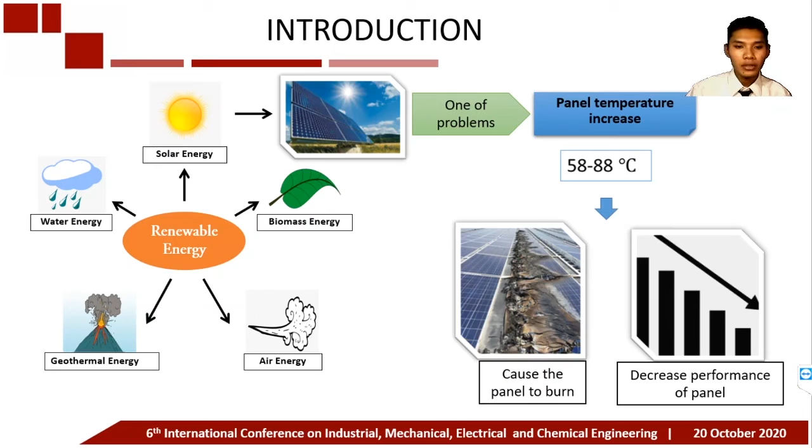There must be a solution to this problem, namely by cooling the solar panels. There are two kinds of solar panel cooling, namely active and passive cooling. Examples of active cooling are cooling with a circulation water system and thermoelectric cooling. Active cooling requires additional power from outside, so it's considered less effective because it can reduce the efficiency level of the entire solar cell system. Passive cooling was chosen because it works without external power and takes advantage of natural convection to transfer heat from the solar panel to the environment.

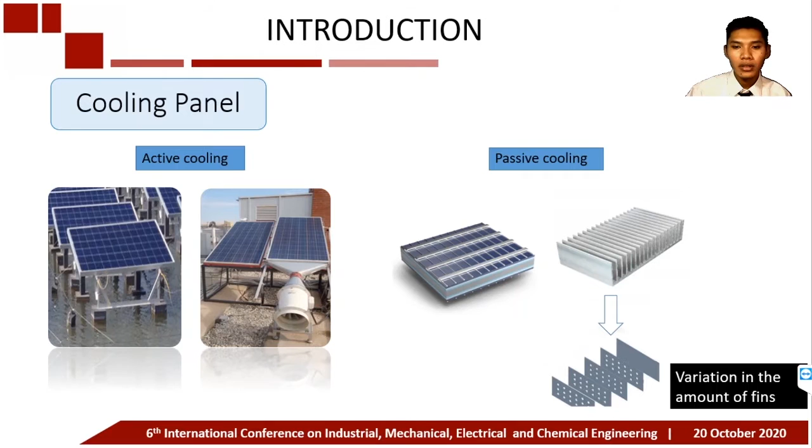An example is the use of heatsinks that have convenience of manufacturing, installation, and placement flexibility for solar cells. In this case, I use a heatsink with a copper-based material and add perforated aluminum fins. The variation of my research is the effect of increasing the amount of fins on the performance of solar panels. And then about the objective: how does the amount of perforated aluminum fins on the heatsink with copper base affect the temperature and performance of the solar panel?

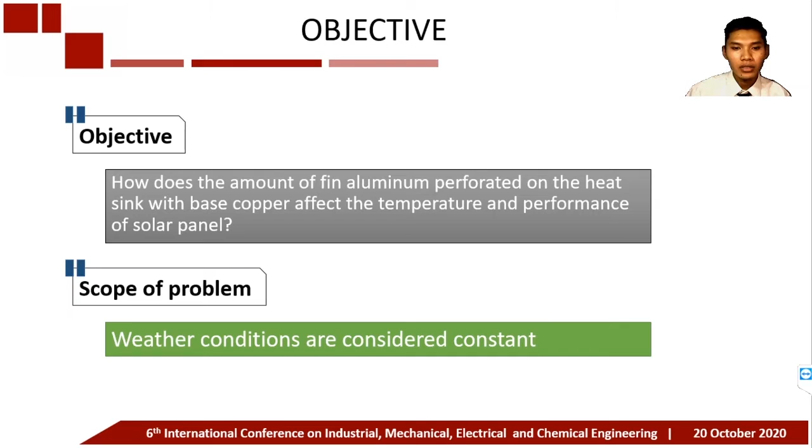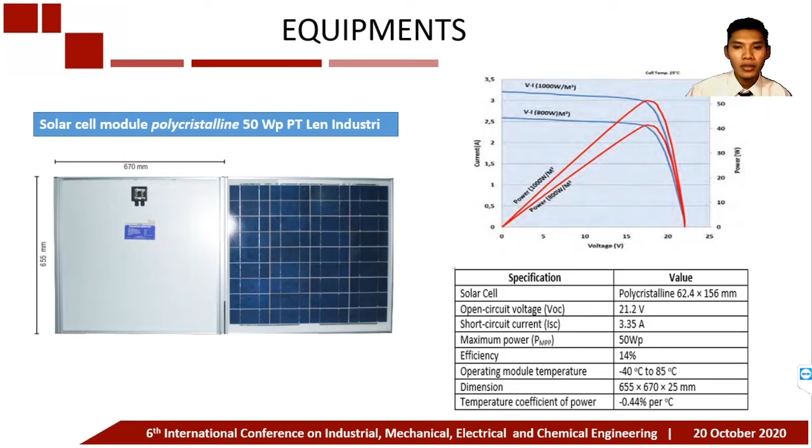Scope of the problem: weather conditions are considered constant. In this research, I used a 50 watt peak polycrystalline solar cell produced by PT Len Industri. The specification can be seen in the table, where the polycrystalline solar panel has a maximum efficiency of 14%. Installation of heatsink: I am using a heatsink with dimensions of 600 by 620 millimeters. The heatsink is 2 millimeters thick on the copper base and 3 millimeters on the perforated aluminum fin. In the variation of 5 fins, the distance between the fins is 122 millimeters, and 10 fins have a distance between the fins of 50 millimeters. The heatsink is mounted on the back of the solar panel.

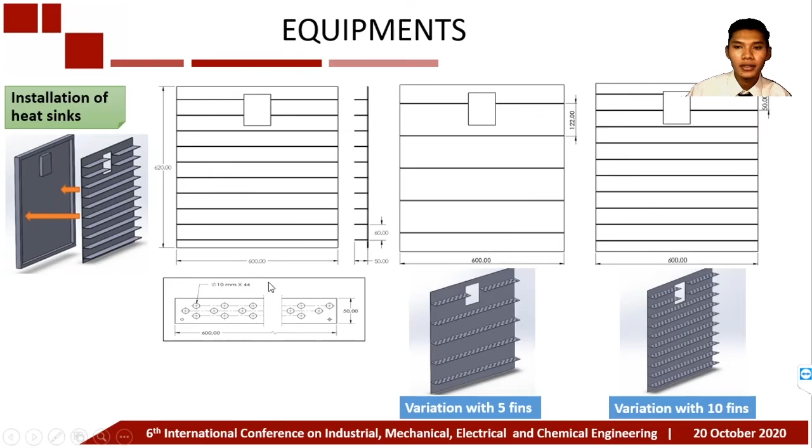And then the result: the temperature graph shows an increase in the intensity of solar radiation causes the temperature of the solar cell to also increase. At a solar radiation intensity of 1100 watts per square meter, the solar cell without cooling, the solar cell with 5 fin heatsink and the solar cell with 10 fin heatsink obtained maximum temperatures of 64.6, 57.7, and 55.6 degrees Celsius respectively. Rahman's experiment also stated that the increase in solar cell temperature was due to the large intensity of solar radiation captured. The higher the intensity of solar radiation, the more photons will be captured. If the photon energy absorbed exceeds the band gap energy limit, the temperature of the solar cell will increase. Increasing temperature can result in decreasing efficiency of the solar cell.

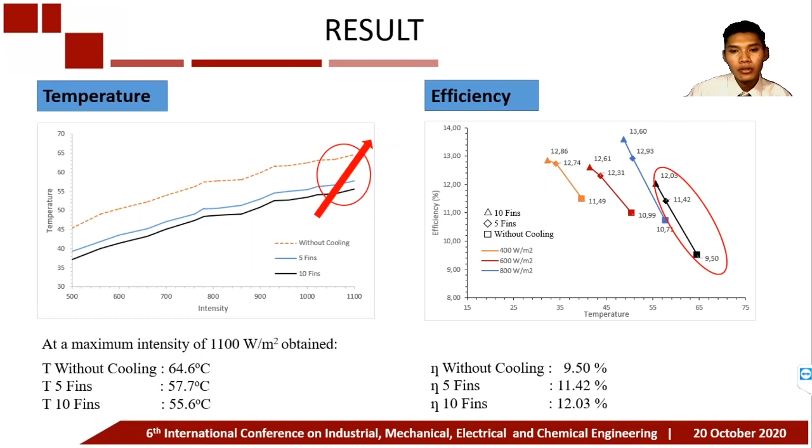The panel with a 10 fin heatsink obtained the highest efficiency compared to the other variations, 12.03% at 55.6 degrees Celsius. The panel with 5 fin heatsink obtained an efficiency of 11.42% at 57.7 degrees Celsius, while the solar cell without cooling got the lowest efficiency of 9.5% at 64.6 degrees Celsius. When the power generated by the solar panel decreases due to an increase in panel temperature, the efficiency produced by the solar panel will decrease.

And then about open circuit voltage: at maximum radiation intensity, the lowest open circuit voltage value was obtained by the solar cell without cooling, 19.2 volts. The panel with a 5 fin heatsink obtained an open circuit voltage of 19.5 volts. The highest value was obtained by the panel with 10 fin heatsink, 19.6 volts. The increase in solar radiation intensity causes the temperature of the solar cell to rise, creating a reverse saturation current effect. This effect is very much influenced by the temperature of the solar cell. The greater the reverse saturation current effect, the more the open circuit voltage decreases.

And then about short circuit current: at maximum radiation intensity, the short circuit current of the solar cell without cooling is 2.81 amperes, whereas the solar cells with 5 fin and 10 fin heatsinks yield 3 amperes and 3.12 amperes. The short circuit current will increase with increasing intensity of solar radiation. The magnitude of the solar radiation intensity affects the energy of photons captured by the solar cell. The more electrons that are excited by photon energy, the greater the electrical current generated.

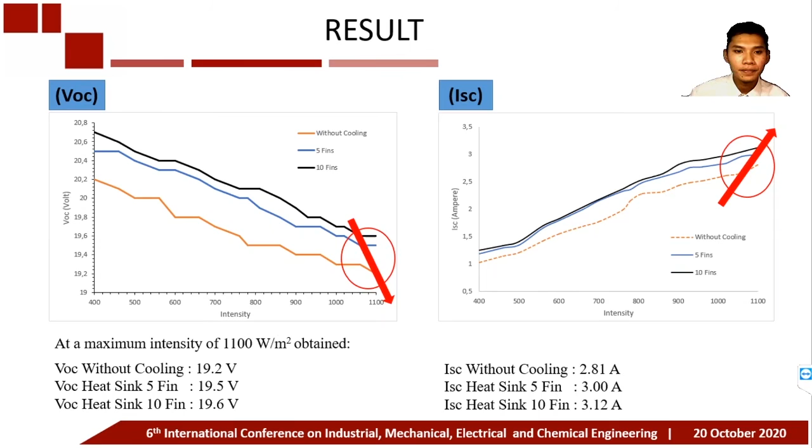And then the output power of the solar cell without cooling is 36.63 watts, while solar cells with heatsinks of 5 fins and 10 fins have output power of 44.02 watts and 46.37 watts. Using a 5 fin and 10 fin heatsink on the solar cell can increase the output power by 7.39 watts and 9.74 watts compared to without cooling.

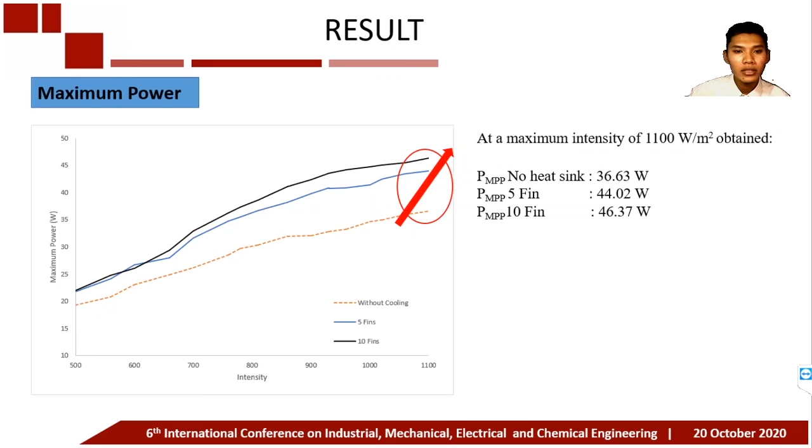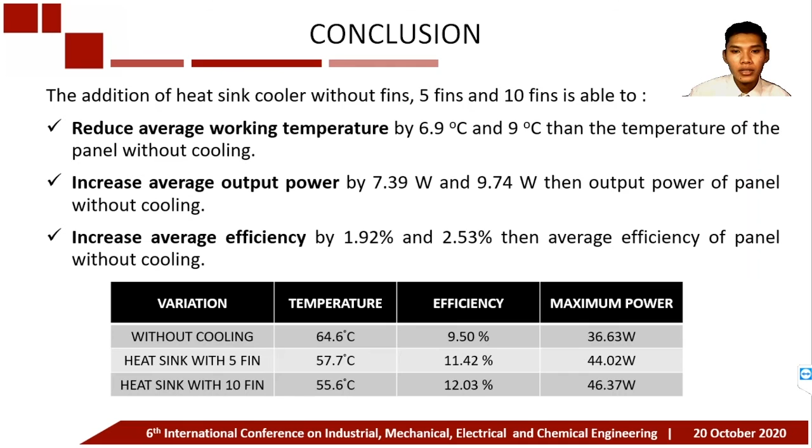And then the conclusion: the addition of heatsink coolers with 5 fins and 10 fins is able to reduce the average working temperature by 6.9 degrees Celsius and 9 degrees Celsius compared to the panel without cooling, increase average output power by 7.39 watts and 9.74 watts, and increase average efficiency by 1.92% and 2.53% compared to the panel without cooling.